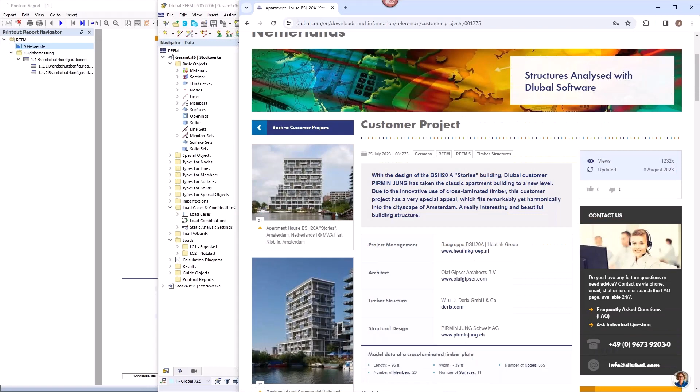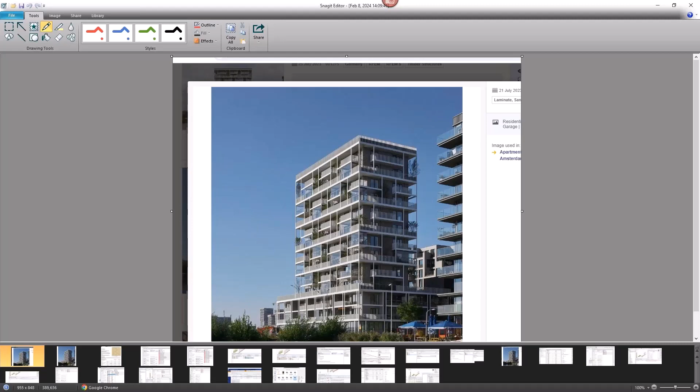The static analysis has been done by the engineering company Pirmin Jung. They're using our software, yeah, that's the key. And this is the building, 13 stories. The point we want to take a look on today is that there is, or what makes the building quite interesting, is that there's a smaller part that is upon the bigger part, and we want to take a look on this story 3 here.

So how can you do this? Now you can first of all make it with model it 3D and regard all construction analysis stages, all this stuff in the 3D model, or you can model it 2D, and then you have to connect each story via the option load transfer. This is the option that I'm choosing here today.

Today, I'm only looking for vertical deformation forces. I'm not looking for horizontal forces for the stiffening of the system - I want to do this in a separate webinar later this year. Today, only vertical deflection and vibration, so wind load and earthquake we will not consider here today.

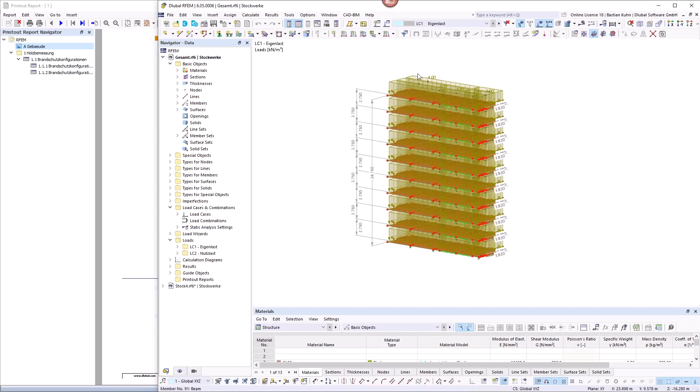As I said, I want to calculate that in a 2D structure, but with 3D effects. Therefore, just to give you an imagination of the structure, I just copied the top stories 4 to 13 in a separate position, so that I make a simplified load case there for the self weight, 4 kilonewton per square meter, and the live load, 2.25 kilonewton per square meter in each story. This gives you approximately a height of 25 meters for stories 4 to 13.

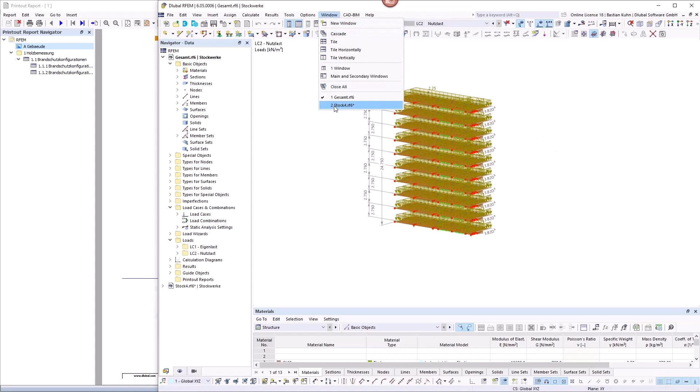And now how can you get the force from story 13 to story 12 and so on? Therefore, I created separate 2D positions. Here is story 4, and I summarize them all - I want to show you that in the Windows Explorer. So I have here story 4, story 5, story 6, 7, 8, 9, 10, up to 13, and connected the forces from the top story above story 4 via the function import support reactions.

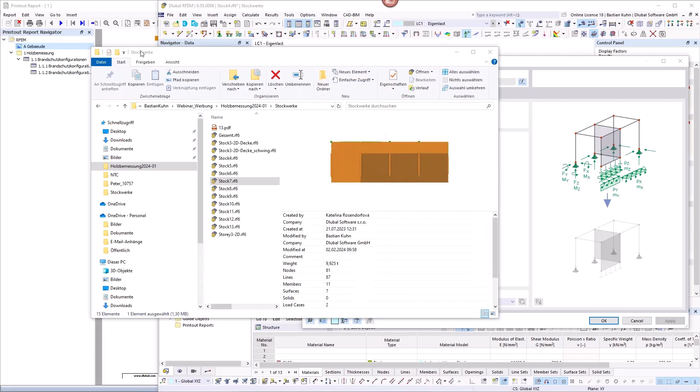Because there I can say, okay, I'm connecting story 5 here, so the resulting forces from story 5 go into this position, story 4. And then I can say, okay, in the model with story 5, I have support nodes, support lines, and then I'm importing them to the current model right here. I can automatically transfer the load case from load case 1 to load case 1 in the new story, and so on - this is how it works.

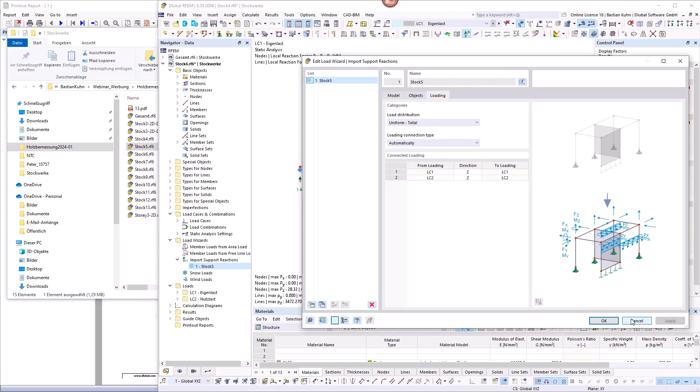I will put on the forces or the load, and here you can see that I have point loads and line loads, and if I activate it, also I have surface loads - this is, as I told you already, the 4 kilonewton per square meter for the self weight and the 2.25 for the live load.

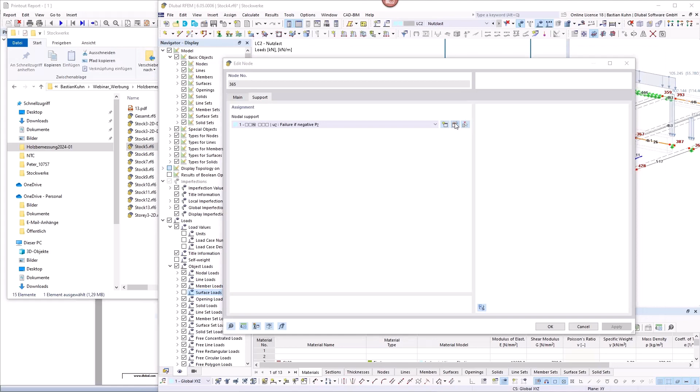But we just want to concentrate on the load that's coming from the other stories. You see here that in this part I also defined nonlinear nodal support behavior. It would also be possible to regard the settling or construction stage via a spring constant in here. All these points would be possible to be regarded and still transfer the load from one story to the other.

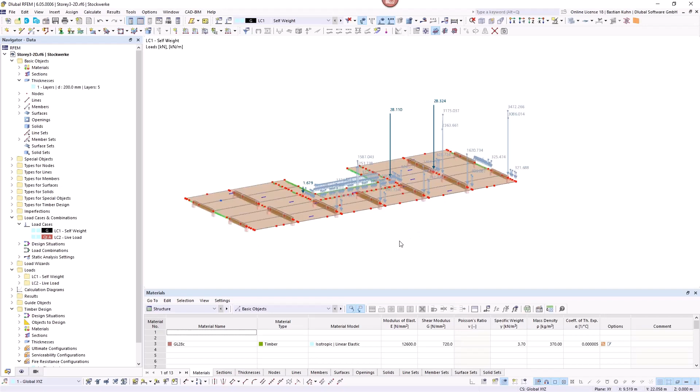Now when we go into the position we want to analyze today, I think it gets much clearer, because I know it can be quite confusing, especially if you haven't worked with RFEM 6 before. You see here I'm in load case 1, self-weight. Also here, when I activated the force, I have 4 kilonewton per square meter in the first load case and 2.25 in the second. These are the only two load cases I want to analyze today. I said it is a simplification today.

I think the easiest way to understand what I'm doing here is to take a look at the point load. So we have 1.68 here and 28.11 there. Now when we look to the previous model from story 4 and take a look at the reaction in load case 1, you see that I have 1.68 here, and if we turn it around, 28.11 here.

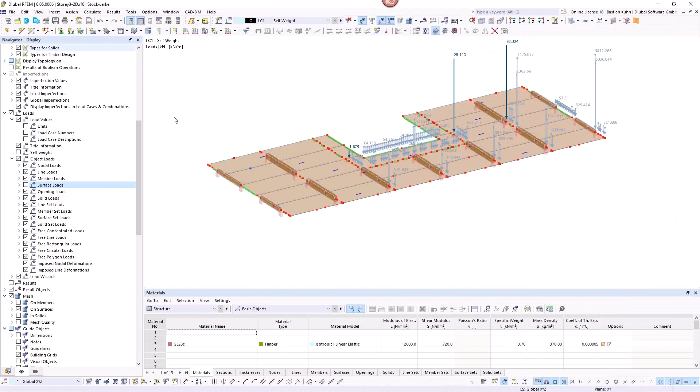So that really is the load transferred from this model into the other. Maybe we take a look at the line load here too. So 591 here, and then I think it should be enough. And right here, you see also 591. So that fits - the load is correctly transferred from story 13 to this part that we are analyzing here.

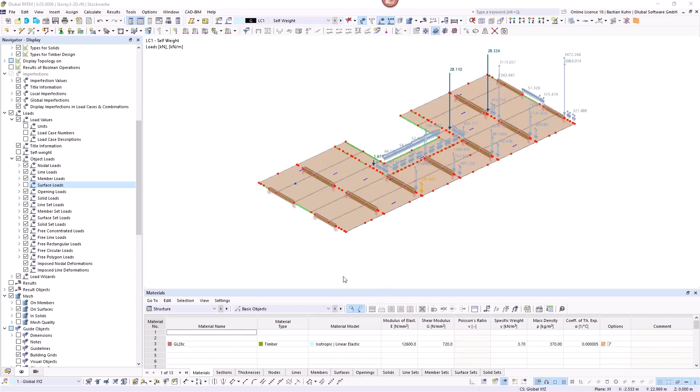Okay, to the structure itself. Now that we have a whole bunch of questions already, it's hard for me to follow them all. All right, there they are. I would like to show you also the dimensions of this structure that we are analyzing today. I'll switch them on - it has a length of nearly 30 meters and a width of 12 meters.

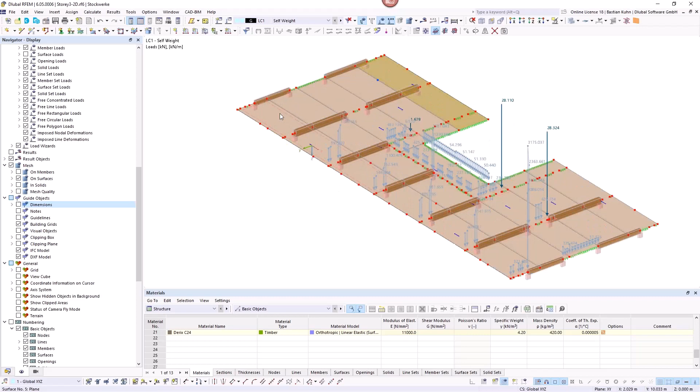I have several CLT plates in here. They are divided in an order so that they can also be produced and brought to the assembly - that's essential that this is possible. They are connected between those connecting points via screws, and the screws in our software are modeled via line hinges. There's another webinar where I get into this in much more detail and also use a script function to calculate them. But today I just took the spring constant over from the existing project. So in X and Y direction I defined this spring in here - that's why it's connected.

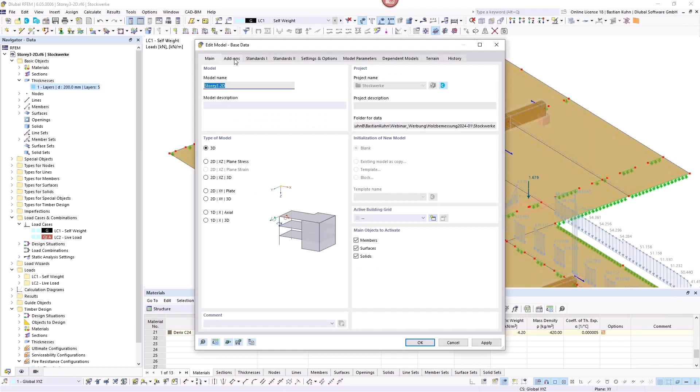The CLT plates themselves I generated with our add-on multi-layer surface. Maybe I'll go a little bit into the base data here. So it's this add-on multi-layer surface, and I'm designing all this stuff in the add-on timber design.

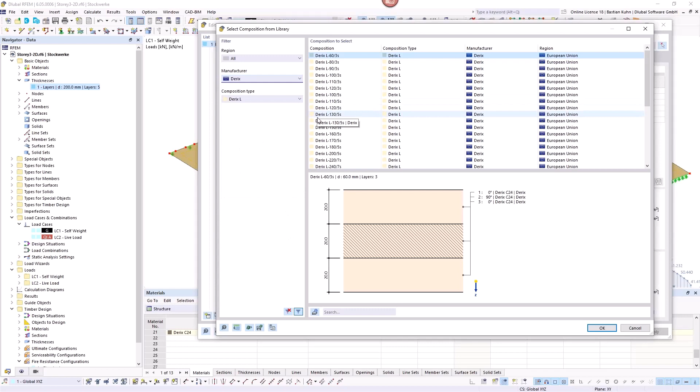And when I defined this layer, I have a database here with all the producers that we are offering right now. So you see it's even possible to have a producer from Switzerland, maybe not this one, Schilliger for example, but of course all the European producers. And if you want to design in America, North America, Canada, then you can also have producers from there. Right now here, I choose the plate from the company Derix, and this gives me a certain amount of stiffness.

I have other options here to regard the failure of net sections and failure including contact surface. This is once again more for the webinar of the stiffening system for horizontal load, and I don't want to regard that today. But what I want to show you is that these layers generate a stiffness that we export into RFEM. So you see that this stiffness, if we're just looking for the top bending elements in here, D11 is way more stiff than D22. So the stiffness in X direction is higher than in Y. That's timber, right? Obviously, nothing so fancy and new.

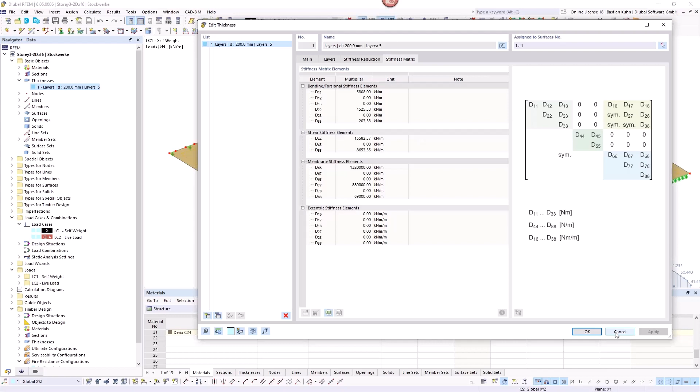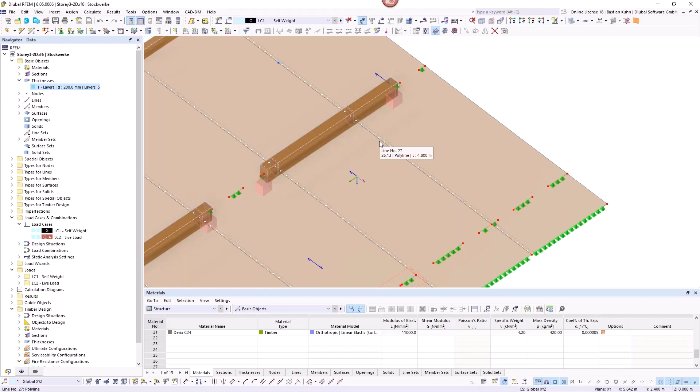But now when I'm working as a designer and constructing it, you probably already realized the blue arrows here. It was in previous versions always hard to know how I'm assigning the plates. If we look at the downstand beams underneath those plates, you see there's a downstand beam supporting this plate, this plate, and this one. Because of this connection point in here, it would not be possible to design it, or well, economically, without this part - that would be quite hard. At least with screws it can be a problem, and therefore this beam was arranged here. It's a continuous beam from this point to this point.

And now when you want to arrange the stiffness, you probably say, okay, I have the span in global X direction. That's where I want to arrange my stiffness. So it's completely right what we did in here.

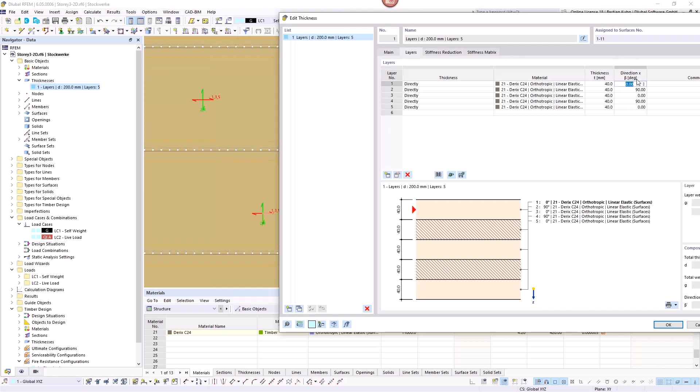And we can also have it much more detailed if you want to look at each layer. I would just directly jump back to the thickness again, or maybe I can even have it here and then jump. So you see my first layer is oriented in 0 degree, the third one is in 0 degree direction, and also the fifth one. And this is then the red arrow here.

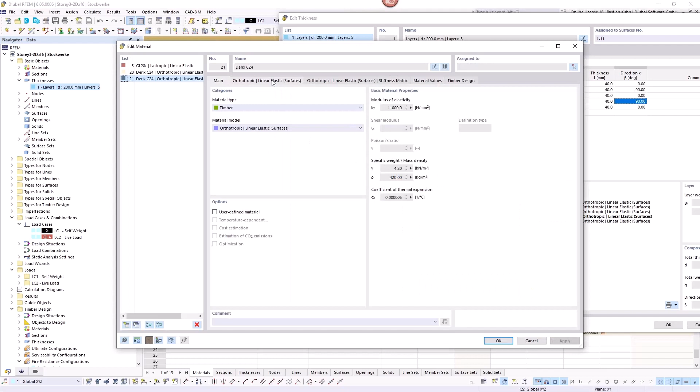And the soft layers of the structure, which has less stiffness, is then in this direction. So I don't want to get too detailed, but in a CLT plate, you are always regarding the stiffness in X direction, and because of the orientation of 0 and 90 degrees, you still have stiffness in Y direction. You saw that in the stiffness matrix.

So what I actually wanted to show is that you will directly get very comfortable with the stiffness direction, and then as a constructor, you can directly see, okay, here it's correct to orient it this way, but here probably not, because there I have supports completely over the whole length, and I also have supports here, and there I definitely want to change that.

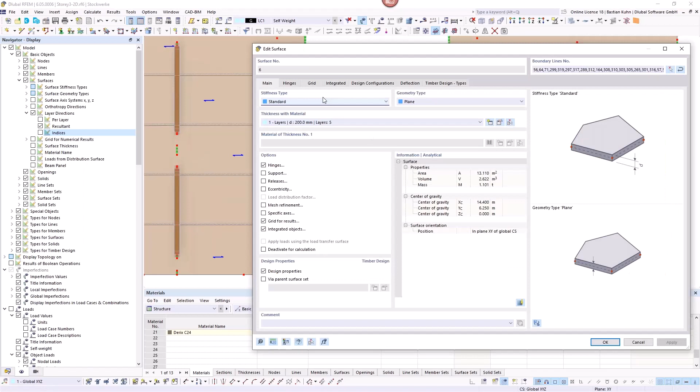How can you change this? If you assign specific axis and define it here by 90 degrees, the whole composition is changed and you see directly that the stiffness works.

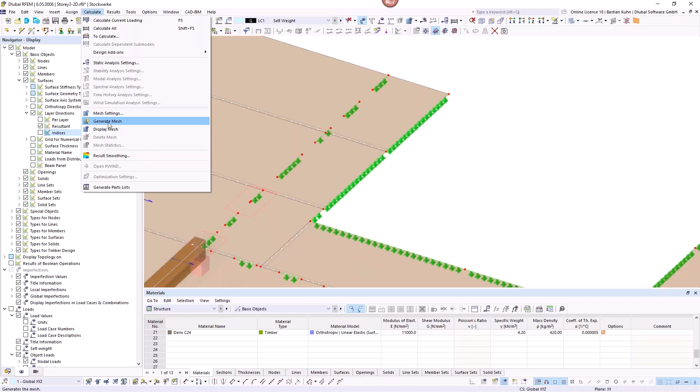All right, that is the plates. I also defined supports, well, just simplified, also only vertical and not movable in X and Y direction, because I think as we are only looking for vertical forces and deformation, this is okay.

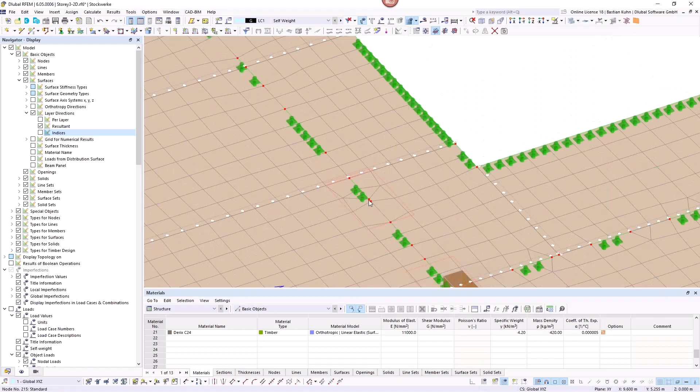I will generate the mesh just to show you another part of what I made in this model. I certainly did take the whole load, once again the example of the point load of 1.68, and defined it with a tiny little eccentricity to the support.

In reality, when you are constructing this, you probably do not assign it to this node. What's the number? 439. You would probably assign it to node 215.

But I did it this way, and this will definitely give you a singularity, which will never occur in real life. Either you can put the force directly to this node, or if the distance gets bigger, there's also the option to define a surface result adjustment. This is what I did in here.

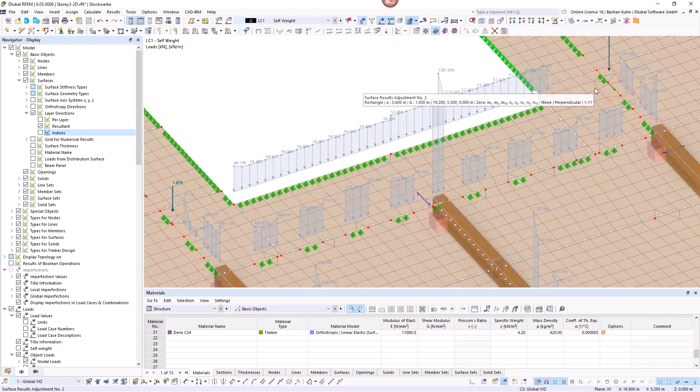All right, and I use this surface result adjustment wherever I have these problems. But I want to show you with this the advantages of this 2D system in here. When I have it in 3D, it could be quite a lot more work to regard it. And also when you say, okay, a downstand beam here, maybe I don't want one, this would also be easier in this position.

Okay, we switch off the load again and come to the beam forces we did. The beam is supporting the plates because they have connection points in here. Otherwise, it would not be possible to assemble them, or to produce them and to assemble them. Both would not be possible. And of course, the engineer divided the beam at these connection points.

It is not necessary with RFEM 6 to divide it, but he did it. And now, how do you regard that as a continuous beam? You will use the option member set.

Okay, when we are already in member set, we can directly take a look at the design types of this beam. We don't want to look for stability today, as we do not have any kind of buckling. And we could also argue that for lateral torsional buckling, it does not play a role here because we have constructive fixing on top of it, so this will not occur.

That brings us directly to the design configuration. Well, the ultimate limit state configuration is then also not so much to do. You can consider the system strength factor. That would be something probably quite relevant in case we are getting right to the borders of the loading with the members. As I said, stability we do not do, and we have also the system strength factor for the surfaces.

So it's always divided into ultimate limit state, serviceability limit state, in the definition of member and surfaces. It's more or less the same what you input in here.

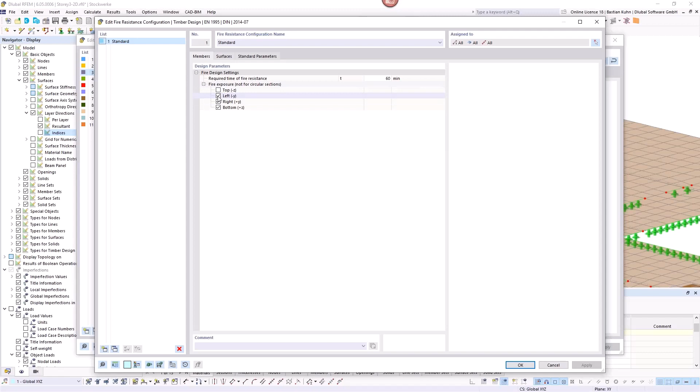Fire resistance verification configuration, that is the new point I want to show you for surfaces. Therefore I will not show that in the members right now. For the member, I want a required time of fire resistance of 60 minutes. And because it's covered on top by the plate, I skip that and say it's only burning left, right, and bottom. 60 minutes, that's what I'm defining.

Then what else can we define for the beams? We can define a member support at the member start and end in this case. Here I said, okay, I have a support length of 30 centimeters, which is quite long.

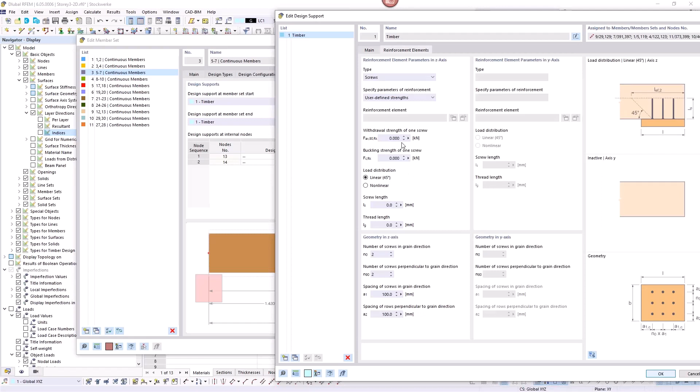Possibly you want to reduce that later on. I'm using shear force reduction that I can always activate. In case I have a shorter support length, I would maybe also want to reinforce the support via screws or with a user-defined strength. All this would be possible. And in order to regard the softwood, I can also increase the factor kc,90 by the factor 1.5.

All right, deformation is nothing I have to do much special on today. I'm just using the reference length. I will come to that when we look for the surfaces.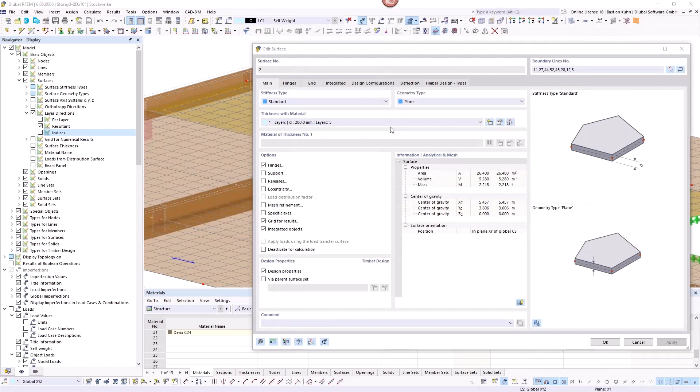And we will take this one here, this surface, and take a look at the design configurations again. The information of the thickness I showed you already, just so you know what we are defining here. We have these reduction factors in here, which play a significant role for the design. That is all transferred into the stiffness of the structure.

Okay, ultimate limit state, serviceability limit state, I showed already. There's not much special to say, but fire resistance - this is the main reason we are doing this webinar here today for you, because we are really happy that we are able to regard fire resistance verification for CLT plates now, and we can regard it correctly with correct reduced stiffness and all these points. I will come to that once we have the verification ready.

So I'm saying I want a required time of fire resistance of 90 minutes, which is quite long. And the default setting here is non-heat-proof glue - not the glue, but the adhesion of cross-laminated timber, which means this is the standard glue taken by the producers. So be aware to take this one.

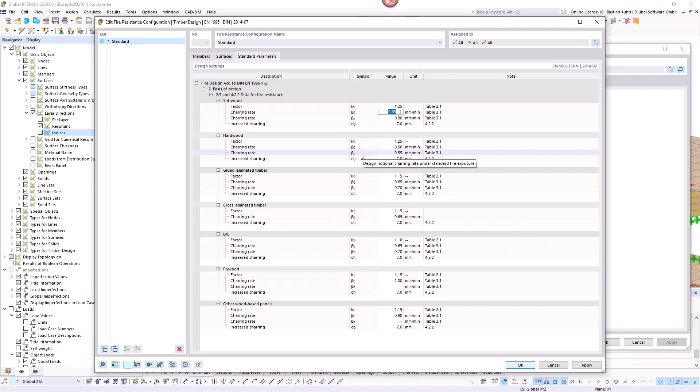And the burning rate that we have in here, we can also control in the standard parameters, and it's probably quite interesting to take a look into that. The charring rate is for cross-laminated timber similar as for softwood, 0.65 millimeter per minute. So you say 0.65 millimeter for the first 25 millimeter thickness.

Then when one part of the structure, or of the layer, is burned, it comes into the area where the glue, the adhesion, works in the connection of the two boards. You have to double the rate, or maybe there are other rules where you even have to increase it. So you say not 0.65, but in this area where the glue is, you say 1.3 millimeter per minute. So that's quite a lot. And that's how it is regarded.

In case one layer of the plate is burned nearly completely, maybe we take a look at the layers again. So if you say, okay, the bottom layer here, where I am with 4 centimeters thickness, is burned completely, then of course it cannot bear any force or any stress anymore. And then there's also the rule to say, okay, when it's burned equal to or less than 3 millimeters, it has to be completely skipped out of the design for the stiffness and the stress.

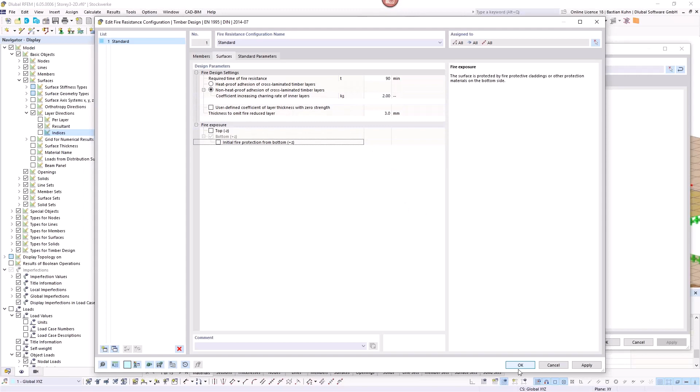In case the bottom is also planked by, for example, gypsum or something else, you can calculate an insulation coefficient according to, once again, the planking thickness, and then the factor K2 should be less than 1. But here today we say, okay, I'm working with this and we will try this one. This is the very important fire resistance, and we will do the combination, do the design, and then come back to this configuration and take a look at it again.

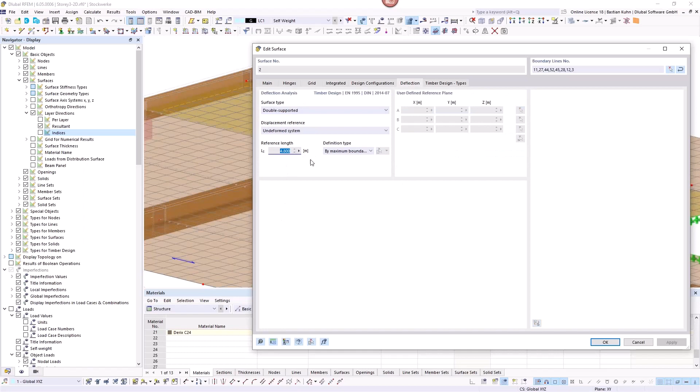Deflection was predefined with the maximum boundary length, which is all right in here. It's from this to this point, 4.8 meters. Of course, and in most of the cases you would want to have it, you can also select a length, but you see here this line is 4.8 meters, so you can really take it this way. Okay, and the service class is similar as for the downstand beams, 1 in this case.

All right, this is the point, and we will get to the combination. I hope I did not miss important stuff, but I don't think so. Okay, we're doing a combination according to Eurocode 5 with the German annex.

Of course, a whole bunch of other annexes are possible, and a whole bunch of standards for any other country is possible here. Once again, we have only load case 1 and 2 for sake of simplification.

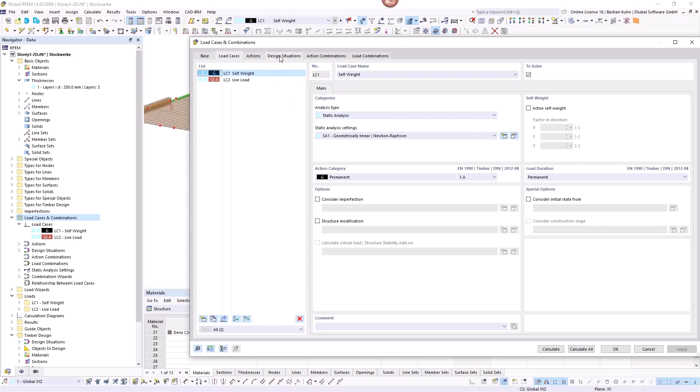Design situation is predefined with permanent for ultimate limit state, and in Germany we have 3 combinations for serviceability limit state: characteristic, which is the initial deformation of the structure, and quasi-permanent and characteristic quasi-permanent with regard to creeping. So these 2 serviceability limit state verifications will also regard creeping.

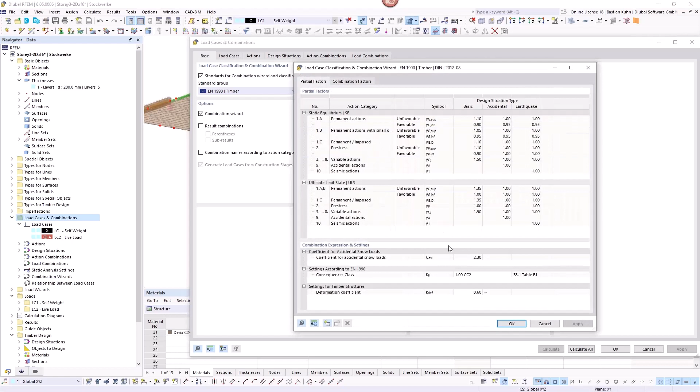The creeping you can define in the basics with settings for timber structure. In case your structure gets nonlinear, you have to regard the creeping factors in stiffness modification, but we do not have this case here.

And of course, we also want to do fire resistance verification. Therefore, once again, in Germany, it is recommended to use the accidental combination for fire with Psi11, which means that your factor Psi11 is put in front of the summation.

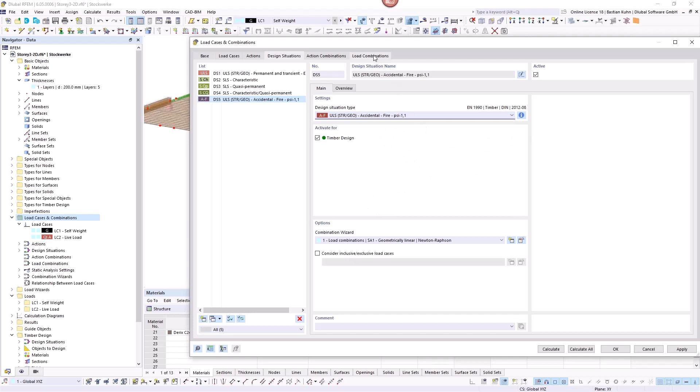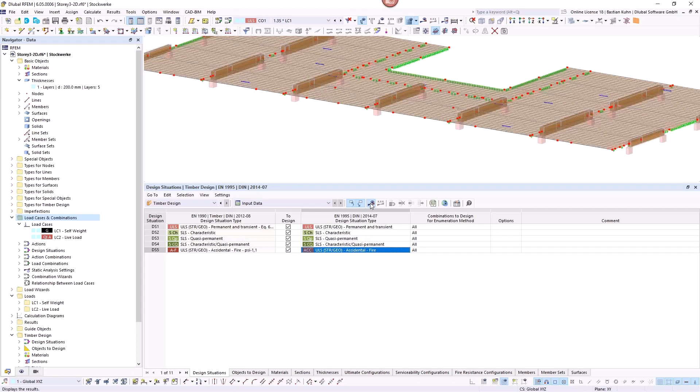Then the only thing left to do is go into the timber design and say what you want to verify. We want, once again, verify ultimate limit state and serviceability limit state. And here is correctly assigned the accidental fire. Vibration we will do later on.

I let the software now calculate, because this gives me the opportunity to show you the printout report a little bit more detailed. But maybe you already asked yourself, okay, it's nice that I can connect several models within one model and have the forces from all of them, but how can I do the documentation of this?

I mean, I cannot say to the other engineers, I magically just have the forces somewhere here. You probably need the documentation for this. And that is what I want to show you during the calculation.

Here I'm opening again the model with story 4, and here you have an option. For example, what you definitely want to have in your documentation is the reaction force from the story, and probably a whole bunch of other parts, but I don't have the aim to make you a complete printout report.

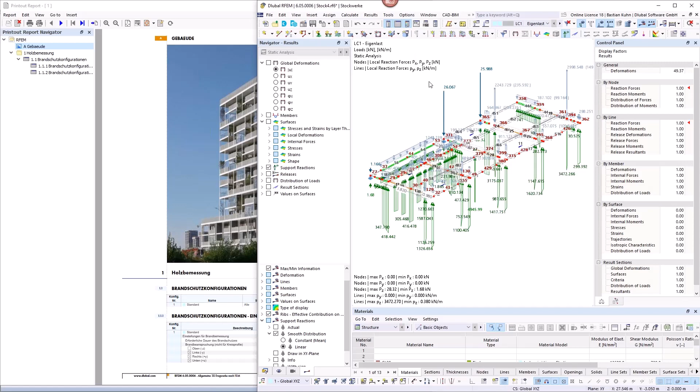I just want to show you how to connect several parts of the other model into this one model. So let's say we have this story 4, and once again, this is connected to story 5, 6, 7, 8, to all the other stories in here. And this is something I want to print to the clipboard.

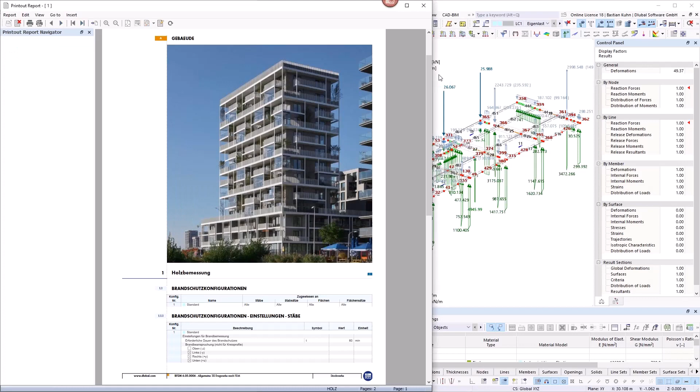And then when I go into the printout report from the model where I'm working on, I can say, okay, this is from story 4, say okay, and have it imported. And while it is loading, I can, for example, open another model.

Of course, right now it's not over the whole front, so this is something you always can change via right click properties, maybe no comments, whatever. So this is all possible.

And one other point that is possible is to say, okay, I don't want to have it from another model, I want to have PDFs and unify them into one big printout report. This is also possible in here.

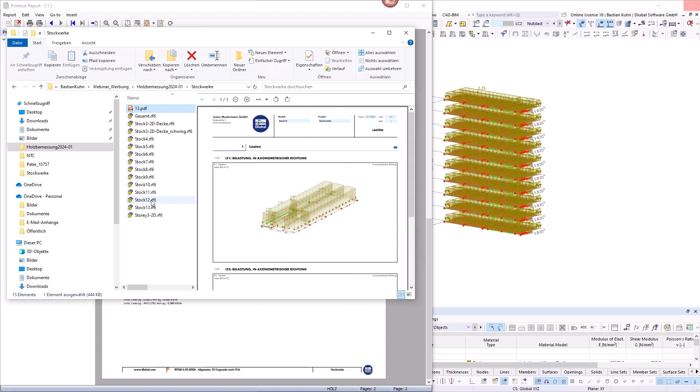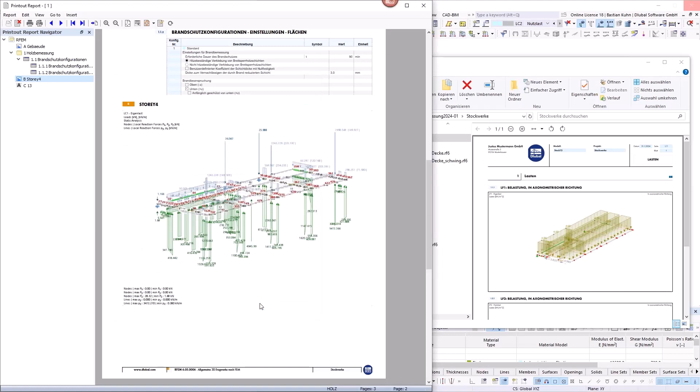For example, I'm just copying the load from story 13, so the top story in here. And when I go once again, insert PDF and select this one here, go opening, and for example, I say all pages. There is a whole bunch of options. Import it, and then I also have this PDF inside it.

These are the options we have for the printout report. I don't want to take a too detailed look into the printout report, but of course, when you go into the settings of it, you have all options to, for example, regard the fire resistance configuration.

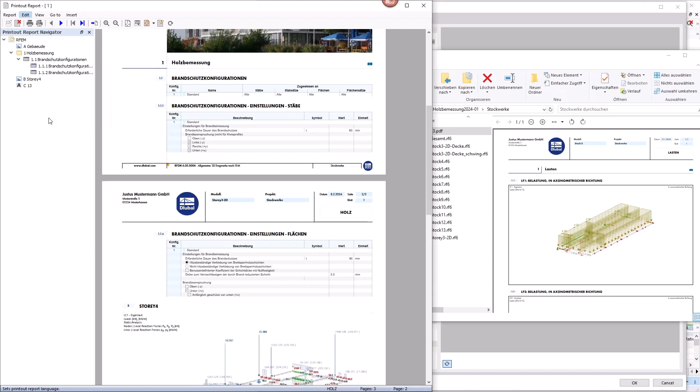Oh sorry, this is in German, this was my fault. Once again, so we probably should change the language into English. Okay, but this is also possible, similar to the software. It's also possible to change the language.

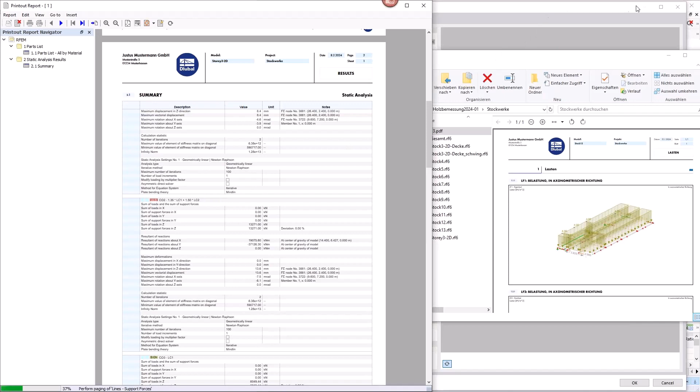Yeah, that's because, so here you see, now it's there, and we have the language in English. So that's also possible, okay, so that we don't need. I think the calculation is now ready. Yes, so that's fine.

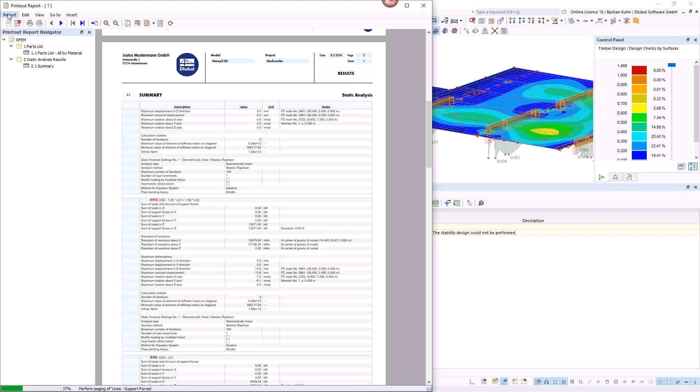Now it's loading all the points to the printout report. That was maybe not the smartest way of doing it, I should have left that. But we can maybe wait a few seconds. Now it's ready, because it's now loading all the stuff into the printout report that I should have skipped.

Okay, so the design of the structure is ready. And the overview at first says, yeah, not really a bigger problem. When we look for the design ratios on the member, that looks quite okay in here. We can also take a look on it graphically.

Maybe we take a look at the biggest loading for ultimate limit state. This is the bending. We can also take a look at the compression, maybe just to have an example or an imagination. So you see, 50% loaded. The length is definitely too long that I chose here.

And maybe we can also decrease the size of the section. Anyway, here's the pressure support verification done, and you have an equation that you can also put to the printout report, to have a nice documentation of it.

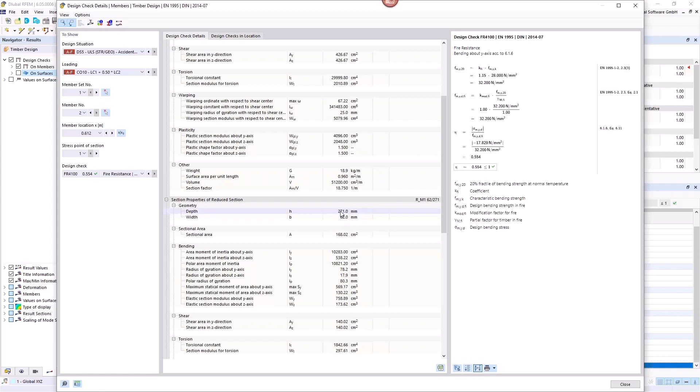Serviceability limit state, without the vibration, is also not really a problem here. And fire resistance, we also take the biggest loaded area, or beam, not area. It's always interesting to see how this is done. So the original height was 32 centimeters with a width of 16 centimeters. And because of my burning rates and fire exposure on the sides, it is reduced to 6.2 centimeters and a height of 27.1. Then the verification, in this case for bending, is done again with this reduced section.

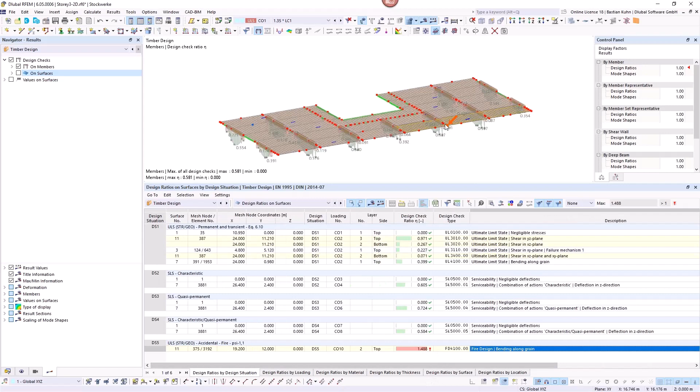That's the beams, and now we will jump to the surfaces. Here you see already the fire resistance, that is not really so nice looking here. It's only a small part of the structure. Hold on, we will get the graphics on again because I skipped that.

There can also be defined an average region, or a surface result adjustment, just like I did in this part here. That would definitely be possible. I'd say 20-30% is something that is probably achievable, at least if it's such a tiny high peak here. It's something you can always do, but I want to try something different here.

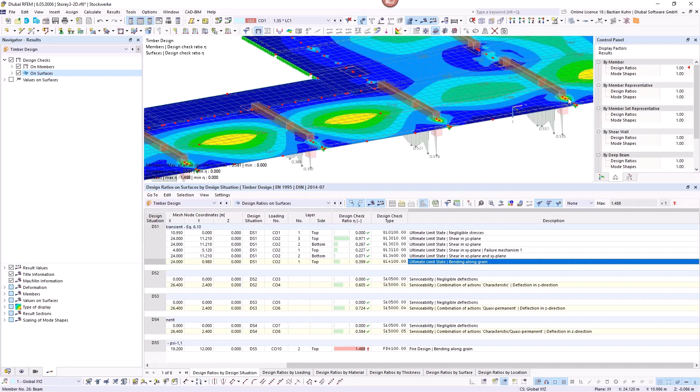Before we do that, we take also a look at the other loadings here. The shear for the punching through area is decisive in this part. That's the usual punching through area you want to take a look at.

We can maybe also take a look at the stress over the whole section, because I think that's always nice to see. You see for the bending how the stress is transferred into each layer of our section, or our surface.

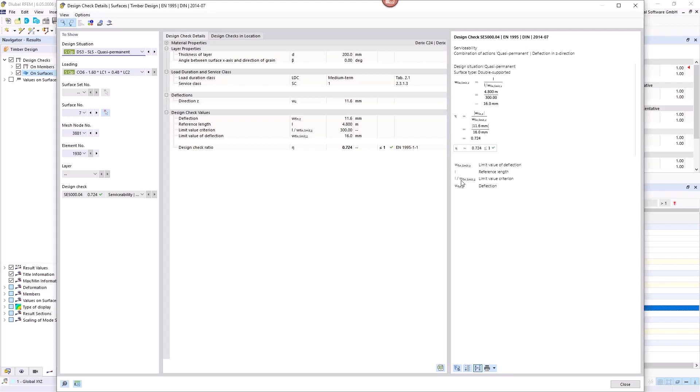Serviceability, that's just deflection. We can take a look at the details too, but I want to show you that via the vibration analysis later on. You see, it's just that we take the limit deformation of 16 millimeters and use this for dividing the existing deformation in this serviceability state.

And that brings us to the fire resistance, where we have this high overloading. It's quite interesting when we look at the result diagram that I showed you for the ultimate limit state before, because now you see the intelligence behind it.

You see, because of the burning, the fifth and the fourth layer are burned completely. This is not only for the stress, but also for the stiffness. The stiffness matrix that I showed is reduced for load combinations 9 and 10.

And of course, now I have only one layer here taking stress, because the other ones, in this direction where I'm looking at the stiffness, are zero. So that's, of course, the worst case that could happen. So 90 minutes with this glue that I'm using here, it will never work, I think.

So that's just quite too ambitious what I tried. Nevertheless, before we change something, we will use it again here and take a look at the charring depths inside.

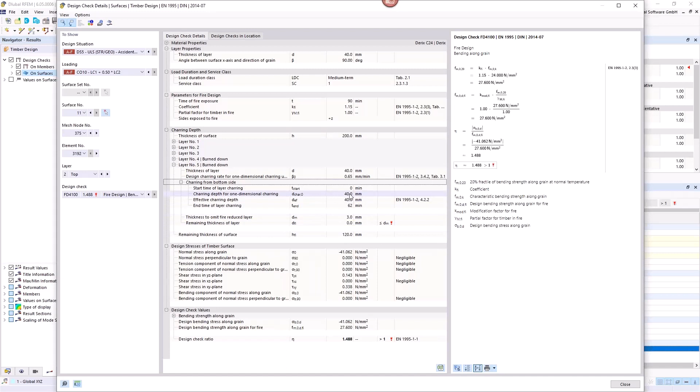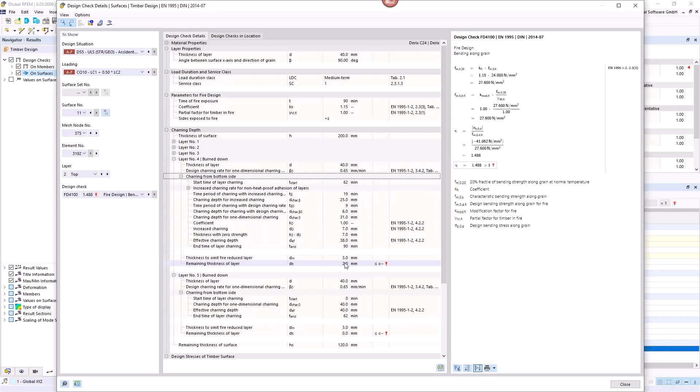So layer 5, I told that already, it is burned completely, of course. By 90 minutes, there's nothing to talk about. But layer 4 can be quite interesting, because I usually had a remaining thickness of the layer of 2 millimeters, but because of this rule that I just showed you, it is burned completely now and has no more bearing capacity. So it's defined to zero.

You probably expected what I'm doing now, because I introduced that a long time ago. The easiest way to increase this now is to use a heat-proof adhesion of cross-laminated layers, because now I don't have to double the burning rates.

You probably saw that it tells me it needs to delete combinations 9 and 10. Why is this necessary? Because the stiffness in combinations 9 and 10 is also reduced by this new charring rate. So we have to export the stiffness matrix for this combination back again into the program, get the inner forces, and calculate it again. And hopefully now, we cross our fingers and hope that it will work.

Okay, it should usually not take that long, because we only have these two combinations, and also for the timber design or the timber verification, it's just in brackets the fire resistance where we need to do the stress analysis again. Still, I know there are a lot of parts to be verified.

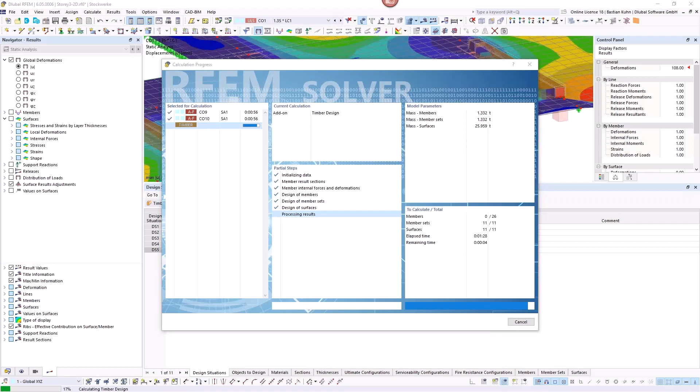Yeah, and there we are already. I'm just scrolling a little bit through the questions, but Gerhard answered them all, and there's not really much questions coming doubled. What can we take a separate look on? No, I can't really see it. Okay, so yeah, but there we have it. I would have shown something else, but now we have the results.

And then we directly jump into the surfaces and look at the fire resistance. And yeah, perfect, you see I have nearly 100% less loading on the structure, because just by this better glue that I'm using in here.

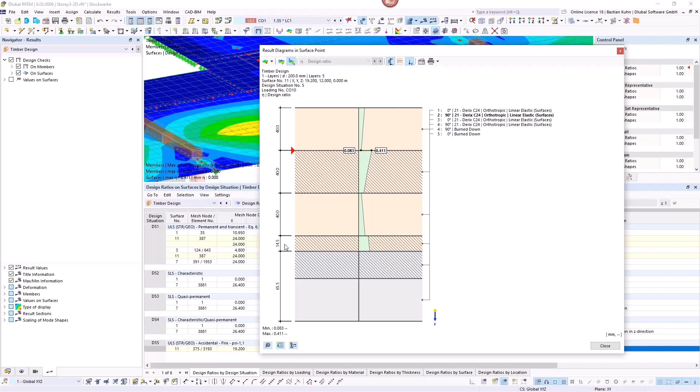And now we can also take a look at this graphic again, and now you see it already: 14.5 millimeters do remain. And yeah, when we take a look at the stress, of course this bottom layer here just gives me so much more load bearing capacity, that it's just the smartest way for me to do it.

In the details, you will definitely see the same in here when you go to charring depths, and then you see here that this is still working. So yeah, once again, this is really a big jump.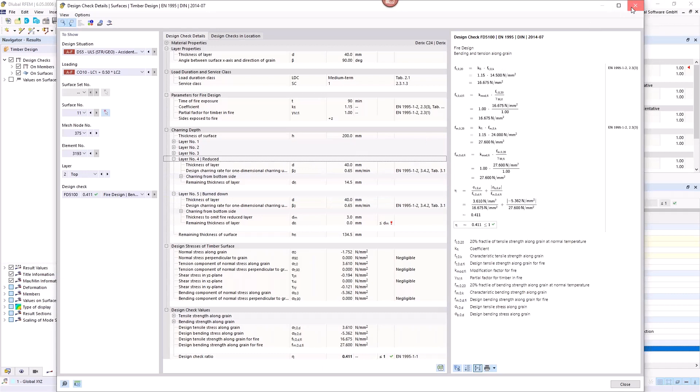I don't know a software out there that is calculating 2D surface elements, assigning a fire resistance verification by also reducing the stiffness. I mean, there's probably some software that will reduce or have the reduced section, but they will not reduce the stiffness. So it's quite important if you look at the effects that it has in here. So that is what we are very proud of, that we have it in our software now, and I think it's one of the best things you can have.

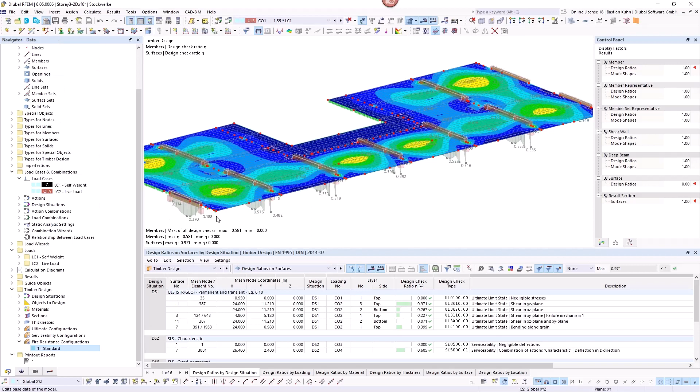Okay, this, and now was only missing the vibration analysis. I want to show you the simplified vibration analysis as a first step.

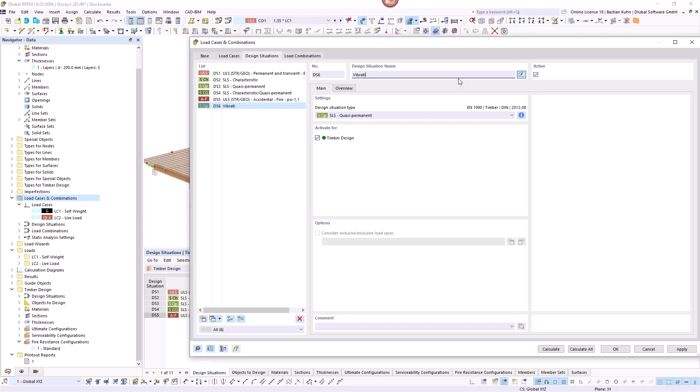Therefore, I'm shutting off the combination wizard and will just define one more additional design situation for vibration, and have in load combination also one more load case that I'm assigning to this, and have 100% of the self weight and 30% of the live load, right?

And yeah, I don't think you want to see the calculation again for all the other objects to design, and therefore I'm just doing the simplified vibration analysis again. You see now I have only one combination and only deflection that I'm showing in here, so that would be quite good and quick. That's the point what I want to have in here.

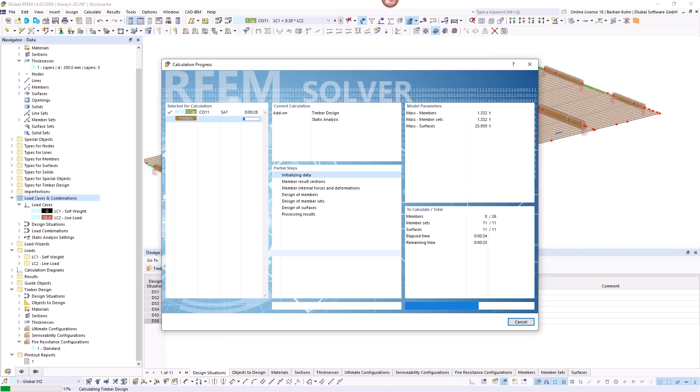The simplified vibration analysis is similar to the SLS verification, in that it's looking where is the biggest deformation, and this is divided then by the limit deformation of 5 millimeters. I showed it to you in the configuration settings, and you see everything's red. That's not nice.

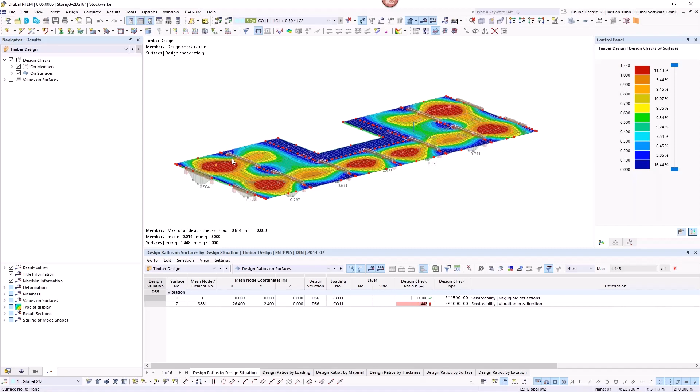If you look at the members, there's not really a problem in here, but of course for the surfaces here in this area and in this area you have the biggest overloading. You have 44.8% overloading of it. Now, how can you regard that?

There are several ways how to do this. What we here in Germany do most of the time is the analysis by so-called Hamm-Richter. What does that mean? It means that we are calculating the frequencies of the structure.

Therefore, I'm copying or assigning a new load case and give it the analysis type modal analysis, and import the load case 1 as a mass in here. And I need another load case for the stiffness criteria. This is the way how this is done.

I will just show you what it means. So when we look at the modal analysis in load case 3, we will calculate the frequency or the hertz of the structure.

And now in this method there is a rule that when you are in independent structures, you should be above 8 hertz, and when you are in dependent areas, so when your own family is introducing the frequency, you should be over 6 hertz. Okay, so that worked for the second rule, but not for the first one.

Okay, so you have two ways to do it. You can either get it stiffer, but it's not really in this problematic part, it's more in this part here where you can try to arrange something. But if you argue, okay, I have maybe a dependent area here, it is fulfilled here. At least it is not

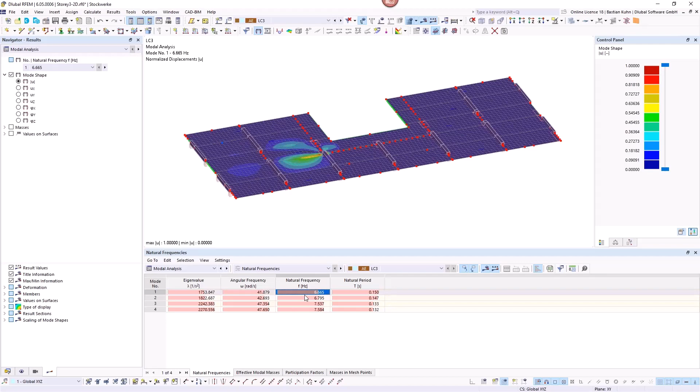44.8% overloaded. And now the second criteria is the stiffness criteria. Therefore, in the maximal deformed part, you have to define a single force of 2 kilonewton, and it should be below the deformation level of 1 millimeter. And when this is fulfilled, your verification is done.

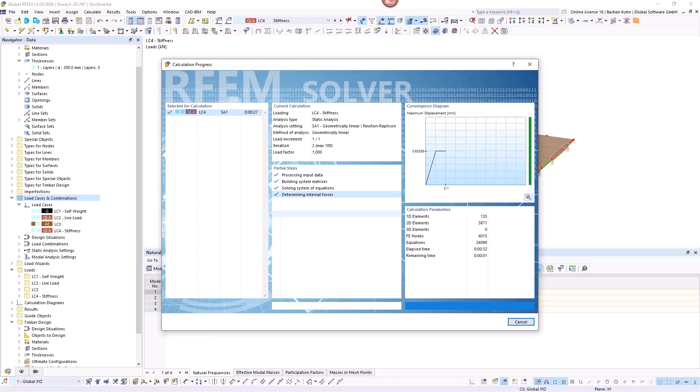It requires that you have an option to calculate the frequency rate, and this method can be even more sophisticated than what I'm showing here. It would also be possible to analyze this with our software, but there you have to define a vibration on the structure and see how the damping works. As with these rules, we are below the level of 1 millimeter, so you can agree or argue that the vibration requirement is fulfilled and that it's okay.

Just as an option, because the simplified approach is really simplified. That's in the nature of such things. Okay, then I see everything's answered. That's always good.